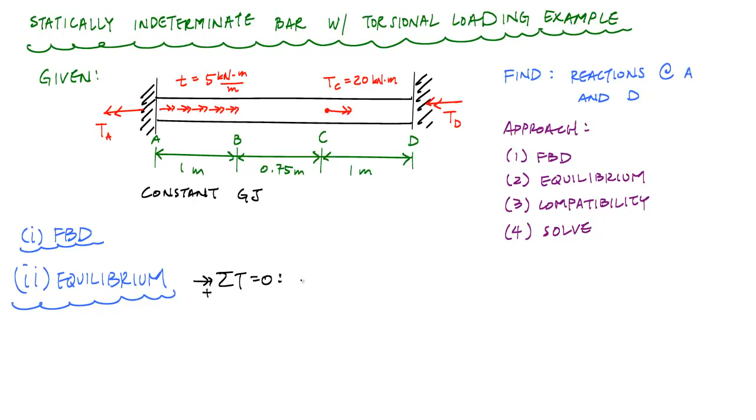I'm going to take sum of the torques equal to 0, positive to the right here, so I've got minus TA minus TD plus this distributed torque times the length of 1 meter plus the concentrated torque of 20 kilonewton meters equal to 0. And I know this is just 5 kilonewton meter per meter. And when I simplify this, it's going to look something like this. This is my first equation from equilibrium. It's one equation. I'm going to number that 1 here.

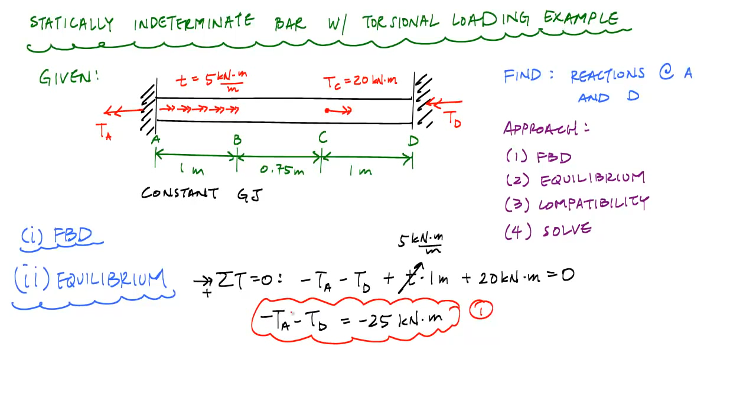But you should notice it's one equation with two unknowns, so I need another relationship to solve this out, and that's going to come from compatibility. And my compatibility relationship says that the relative angle of twist between point A relative to point D is equal to 0. And that can be broken up into all the little segments here. So I would say this is the sum of the angle of twist in segment AB plus the angle of twist in segment BC plus the angle of twist in segment CD.

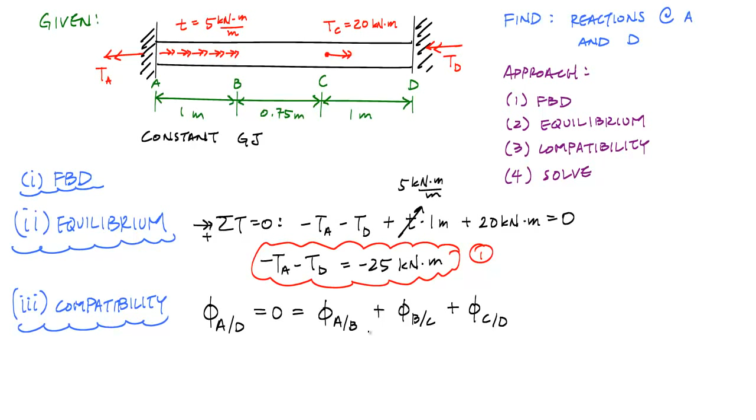And by substituting in for these segmental angles of twist, if you will, I'm going to get another equation to solve for all these reactions that I need. The compatibility part takes the most work because really we have to find the internal torques in each segment as a function of these reactions that we've set up here, these TAs and TDs, so that we have another equation. So let's go ahead and do that. We're going to calculate the internal torques for each segment.

So let's take a look at segment AB. So what we'll do is make a cut here through segment AB and draw a free body diagram either of everything on the left of the cut or everything on the right of the cut. In this case, I'll just choose everything on the left of the cut. So here's part of my free body diagram for the cut through AB, looking on the left side of it.

And here you see the TA, the distributed torque here, and you have to also remember to draw the internal torque that would be appearing at this cut here, and always draw it assuming that it's going to be positive. So this will be TAB. And also what we need here is to define a location of this cut, an arbitrary location. I'll call this X because we have a distributed torque here, and the resultant torque depends on the length.

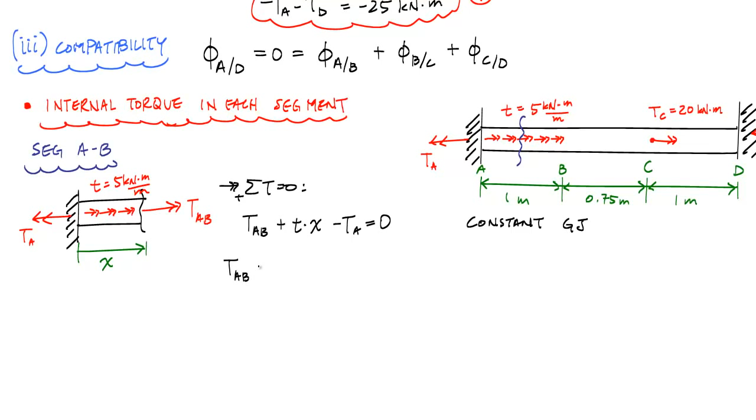So if I take equilibrium, sum of torques positive towards the right, I'm going to get an equilibrium equation that's going to look like this. And I can manipulate this to solve directly for TAB. So TAB will be, and this is my internal torque in segment AB. Now let's look at the internal torque in segment BC, which will just involve a cut through segment BC here, and I either look at the left or the right side of that cut.

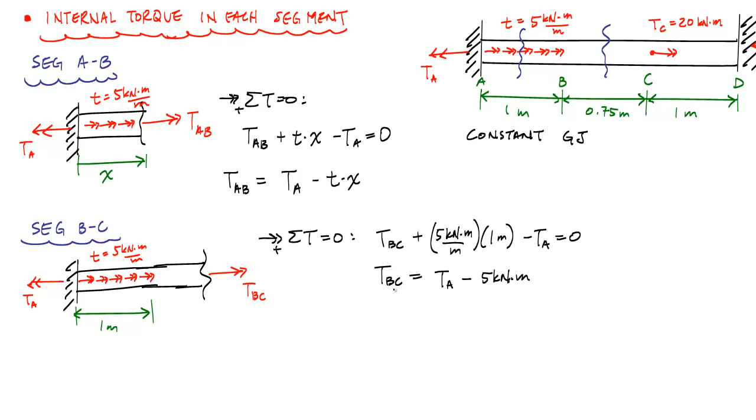So here's my free body diagram for segment BC, and you'll see that I have the entire distributed torque here now over the entire 1 meter, the reaction torque at A, and then the internal torque at BC in the second segment. And I'm just going to apply the equilibrium equation to solve for TBC. So here's my internal torque at segment BC defined in terms of TA minus 5 kilonewton meters here.

And now what we want to do is look at segment CD, which will just be a cut here. And when I look at the free body diagram for segment CD here, I have a choice. I could go look at all the way to the left or look at the segment on the right. And you're going to be tempted to look at the segment on the right. But what happens is if you look at the

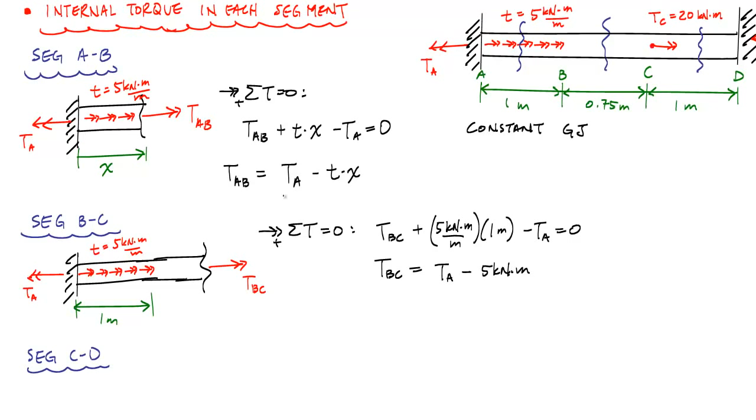segment on the right, you introduce TD to the compatibility relationship, and you end up having maybe a little bit more complexity in terms of solving for the two equations and two unknowns. Whereas if you consistently look at the left here, all the internal torques will only have TA on it, and when you take this back into compatibility, you'll just be able to solve for TA directly.

Here's my free body diagram for segment CD, and now I just want to apply the equilibrium equation to come up with my definition for the internal torque at CD. And here's my equilibrium equation, and all I gotta do is solve for TCD, which will be TA minus 25 kilonewton meters. And notice here again that I have kept everything in terms of TA, and so when I substitute this back into my compatibility relationship, I'm just going to be able to get the answer for TA directly.

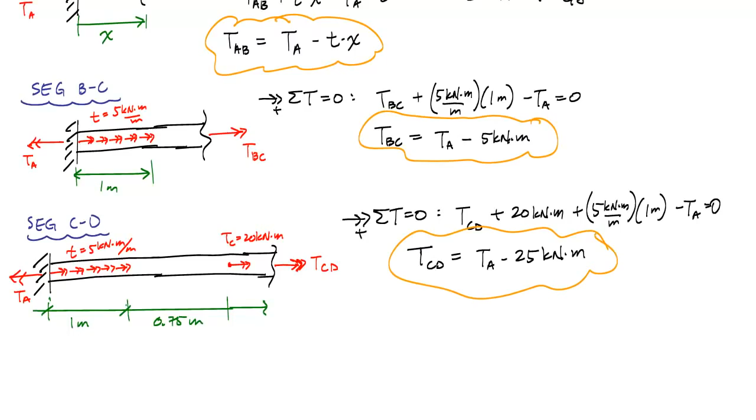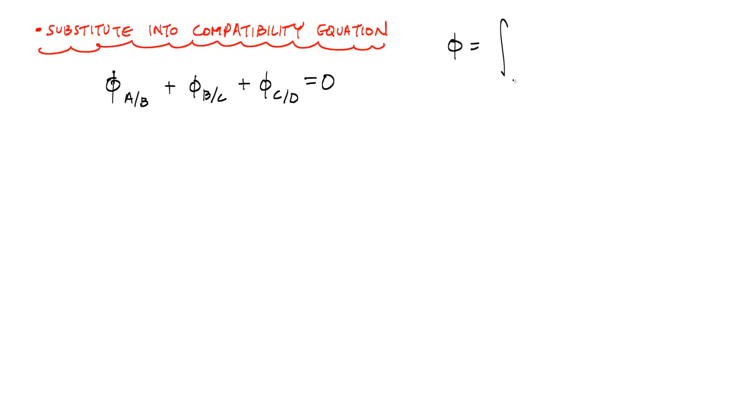And so here I just want to circle these, my definitions for the internal torques of each segment. Now I'm ready to substitute back into my compatibility relationship. And the thing you have to remember is that the most general definition of the angle of twist was this integral from some location to another, the internal torque T(x) dx over GJ(x). And if you had a constant cross section, meaning a constant polar moment of inertia and a constant internal torque, this would become the sum of TL over GJ of the segments. So keep that in mind when we substitute back into this compatibility relationship.

So for segment AB, what we had was an internal torque that varied as a function of the position or wherever we cut. So here this would be the integral from 0 for segment AB. That segment was 1 meter long, so 1 meter, of TAB as a function of x dx over GJ. Okay, so I'll leave it like that for now before I substitute the internal torque back in. And then for segment BC, I had a constant torque, so I could just go TBC LBC over GJ, plus TCD LCD over GJ. And all this equals 0.

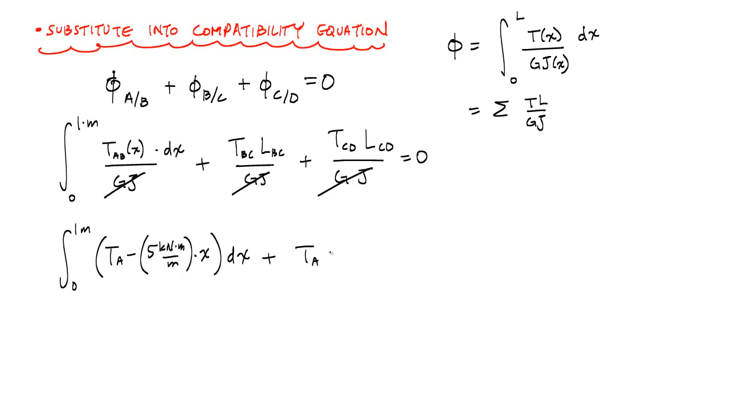Now I can substitute the definitions of these internal torques into this formula. And with this substitution, it's worth noting that because we have a uniform GJ, or uniform torsional rigidity, constant all the way throughout, we could just multiply through and get rid of it. Now when I substitute for these internal torques, it should look something like this. You'll notice here that everything is in terms of TA, and I've got one equation and I can just solve for TA. And so if I evaluate this integral in my compatibility relationship, I will get the following.

And if I solve this integral out, I'll get that this is TA times 1 meter minus 5 halves kilonewton meter squared. And now you'll see that I can divide out a meter here, and there was a meter here that got canceled out. Boom, boom, bam. And if I work this out, this becomes relatively simple. It becomes 2.75 TA is equal to 31.25 kilonewton meters, and when I solve for TA, it's 11.36. So this is from my compatibility result.

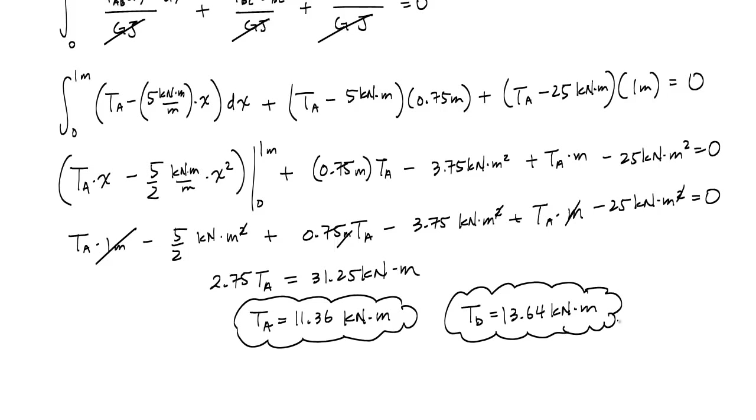If I take TA and substitute into my equilibrium equation, I'll get that TD is equal to 13.64 kilonewton meters. And the positive results just indicate that the way I drew it initially, way back in the free body diagram section, is correct.